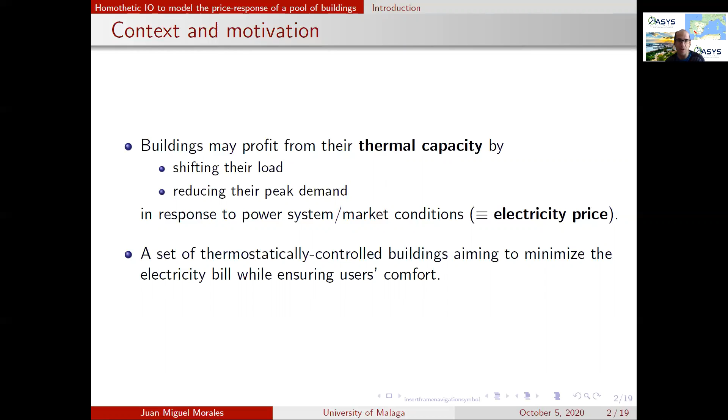Our goal then is to model and forecast the aggregate price response, that is, the aggregate thermal power consumption of the ensemble of buildings. We are facing three main challenges here. First of all, we want to do this prediction one day in advance for the 24 hours of the following day. Furthermore, we want to do it well, and for that purpose, we will need to capture both the thermal dynamics of the pool of buildings and the user's reluctance to experiencing discomfort. So let's see how we are going to do this.

This slide introduces the key ingredients of our approach. Throughout the presentation, we are going to talk about a building prototype, which is going to represent the average behavior of the pool of buildings. We will use the superscript P to represent the operational variables that refer to this prototype building. We will consider that the feasible operational region of the actual ensemble of buildings can be described well enough, at least, as a homothet of the feasible operational region of that building prototype. This homothetic transformation is going to be characterized by two parameters, namely the dilation factor beta and the translation vector tau.

Okay, the variables and parameters corresponding to the aggregate building model will be identified with the superscript A. Our forecast model will also make use of a piecewise linear utility function with marginal utilities M. These marginal utilities drive the maximization of the building's users' welfare and the minimization of their discomfort. Finally, we will use inverse optimization to infer or statistically estimate parameters beta, tau, and M, which characterize our forecasting model, which is in turn formulated as an optimization problem. That's why we need to use inverse optimization for the statistical inference.

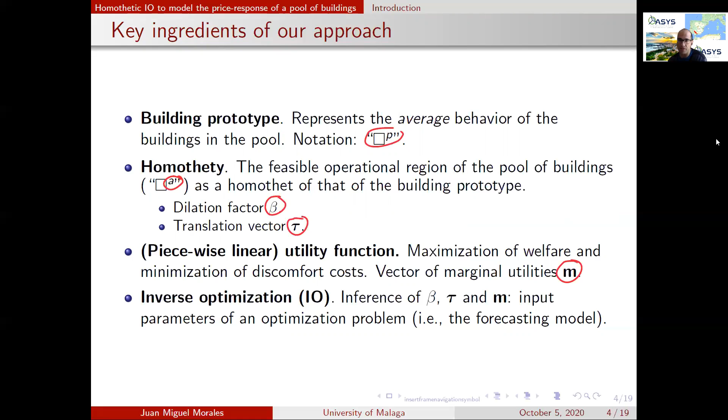This is the model we use to capture the thermal dynamics of the prototype building. It is essentially a first-order discrete dynamic model where in blue, we have indicated the parameters or data that we know, while in black, we have the operational variables that are to be controlled or kept within certain limits. For example, this variable P represents the cooling power because we are considering only cooling mode here. This cooling power must be lower than the rated power capacity, which is a blue parameter, okay, it's data.

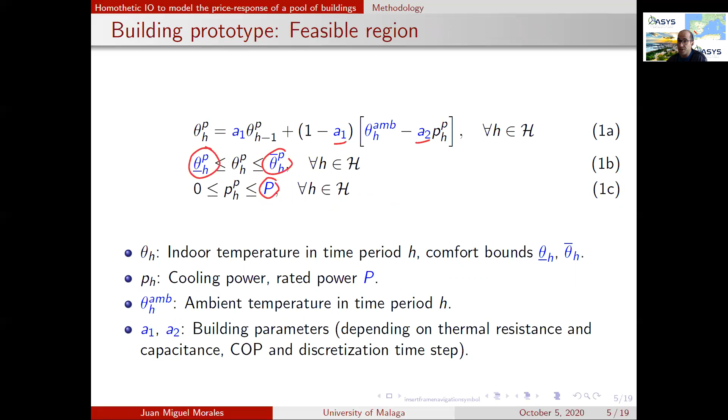Then besides, theta here stands for the state variable, which is the indoor temperature that must be kept within the comfort bounds, upper and lower. The theta amb represents the outside temperature, and parameters A1 and A2 are characteristic parameters that depend on the building thermal properties and the discretization time step. This is exactly the same model as before, but in a matrix form, okay? Here in 5, sorry, we have the equations. The equations are given for all the hours of the day, while here we have collapsed them using matrices and vectors.

So here comes the core idea of our approach. We assume that the aggregate cooling power, PA, can be obtained as a homothetic transformation of the cooling power of the building prototype. So 3A and 3B constitute the model of the aggregation of buildings that results from this transformation. In pink, very importantly, we have highlighted the parameters beta and tau that characterize the homothetic transformation, and that we will need to estimate statistically using inverse optimization, as I will explain later.

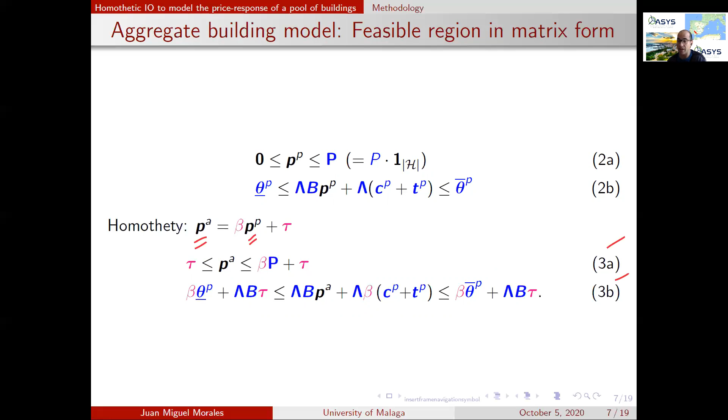So we are now ready to introduce our forecasting model. 4B, 4C, and 4D, here, here, and here, are the homothetically transformed thermal equations we have just seen. In the objective function, we have the maximization of the pool utility by way of the vector of marginal utilities, and the minimization of the discomfort cost.

So how does this model work? Given the 24-hour vector of prices, lambda d, which is a blue parameter because it's given, we solve this utility maximization problem that captures the pool thermodynamics by means of 4B, 4C, and 4D, to compute the forecasted aggregate cooling power.

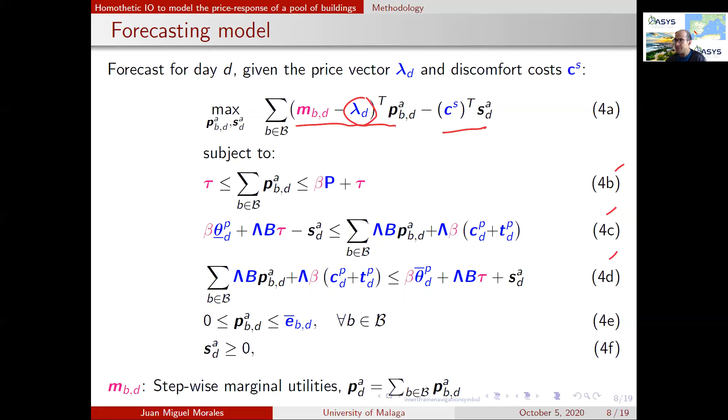As I said before, we consider a piecewise linear utility function, which renders a stepwise marginal utility function like the one I'm representing here as an example in this figure. This one consists of 3 steps. The aggregate cooling power is given as the sum of the contributions from each of these steps, or blocks.

Just to mention also that we make the vector of marginal utilities, which in this example is characterized by 3 values, M1, M2, and M3, an affine function of some covariate information that I will explain later in our numerical experiments, but it's given info as well.

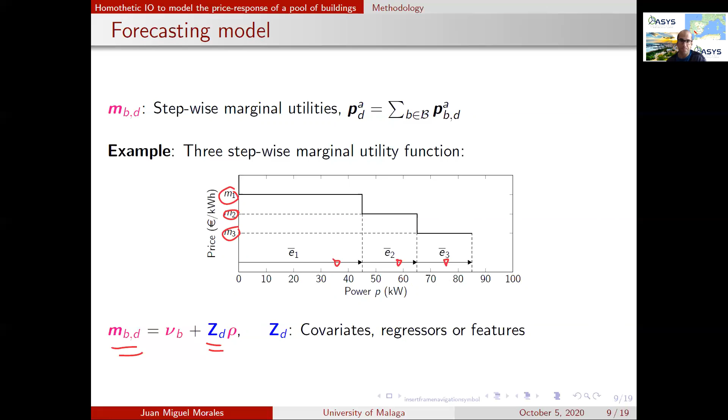So the question now is, how do we estimate the characteristic parameters M, beta, and tau? These are the parameters of an optimization problem, our forecasting model. So we use inverse optimization, which translates into solving the following bilevel program.

The idea is that given observations about the aggregate consumption of the pool of buildings, the associated vector of electricity prices, and the covariate information, the upper level computes beta, tau, and the vector of marginal utilities, such that the cooling power delivered by our forecasting model, that is the lower level problem, matches as much as possible the observed one. This here is the vector of the observed aggregate power of the pool of buildings in day d. We do this on a training set.

The upper level problem also includes constraint 5B and constraint 5C, this one, to guarantee that the piecewise linear utility function is monotonically increasing. The upper level variables beta, tau, and m enter our forecasting model, the lower level problem. Then we have the upper level that seeks to minimize the mean absolute error on the aggregate power consumption of the pool of buildings.

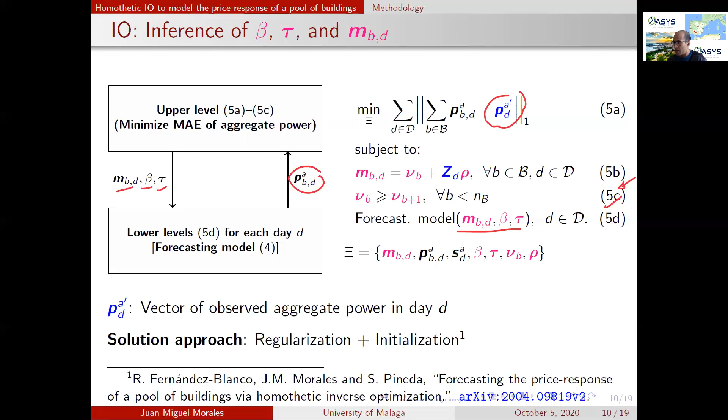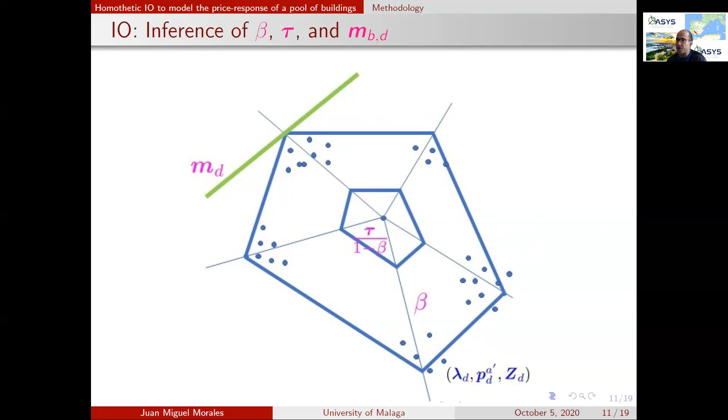But furthermore, we also compute a vector of marginal utilities so that these observations are not only feasible, but also optimal. Optimal for our forecasting model, which is an optimization problem.

Next we present some results from numerical experiments. In particular, we have tested our approach on a synthetic data set obtained assuming that the thermal power consumption of each building in the pool is controlled by means of the optimization problem represented here, optimization problem 6. This optimization problem seeks to minimize the electricity bill of each building plus some discomfort cost. These costs are given by a penalty that multiplies the deviations of the indoor temperature with respect to the comfort bounds.

Equations 6b and 6c model the thermodynamics of the building, as we have seen before, and the buildings in the pool are different according to a heterogeneity factor H bar. This H bar controls how different the buildings in the pool are. In particular, the parameters of the building are sampled from a uniform distribution, like this one, whose mean is equal to the values of the parameters for the prototype building.

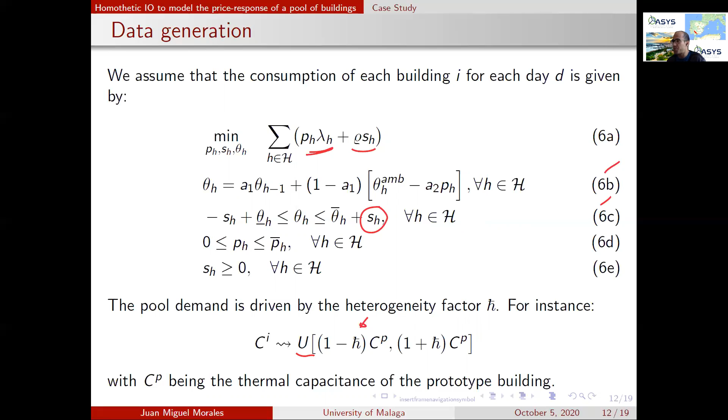We simulate this model, model 6, for 100 buildings and 78 days. We use 35 days for training, 35 days for validation, and the last 7 days for testing. We have created two synthetic data sets, each with a different heterogeneity factor, namely H bar equal to 0.1 and H bar equal to 0.75. Observe that the highly heterogeneous pool features lower peak demand, lower mean, and no hour without consumption.

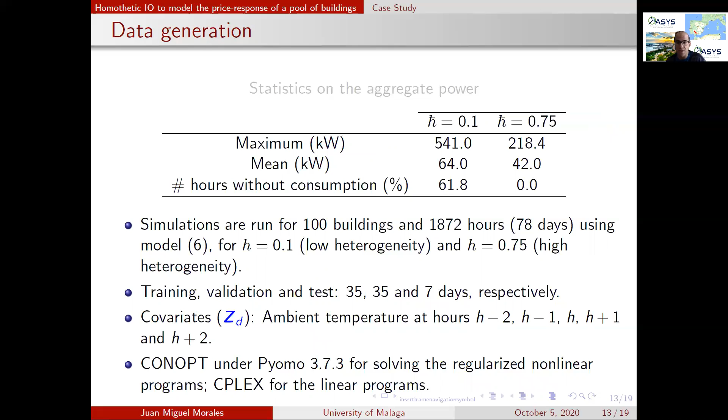We employ as covariates the outside temperature for the current hours and the previous and posterior 2 hours. We use CONOPT to solve the regularized nonlinear problem that results from the bilevel inverse optimization approach. Here I present the methodologies that we have compared. HIO is our homothetic inverse optimization approach.

NTD is the inverse optimization approach proposed in Saez-Gallego and Morales, where they do not explicitly account for the thermodynamics of the pool of buildings. ARIMAX is a classical autoregressive integrated moving average model with exogenous variables. And then we have the naive model, which is basically a persistence model such that the forecast in day D is equal to the observed values in the previous one, in day D-1.

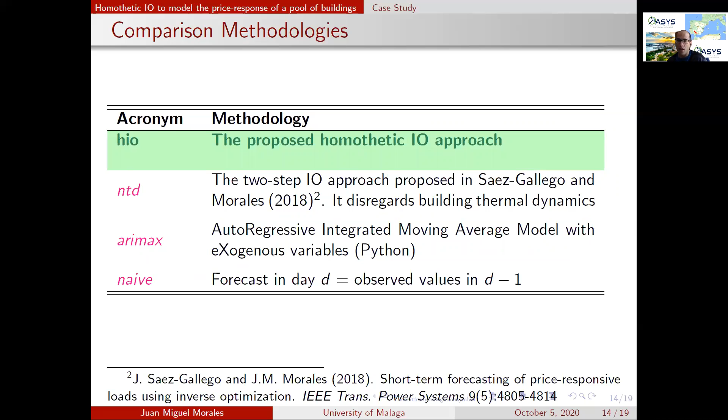Okay, in this table, we compile all the results related to these numerical experiments. We have used the mean absolute error computed over the test sets to assess and compare the different methods. We test, as I said, on the two synthetic data sets that I mentioned before, each corresponding to a different level of the pool heterogeneity, and for two different numbers of marginal utility blocks, specifically 1 and 6. We highlight in pink the best outcome, that is the lowest error.

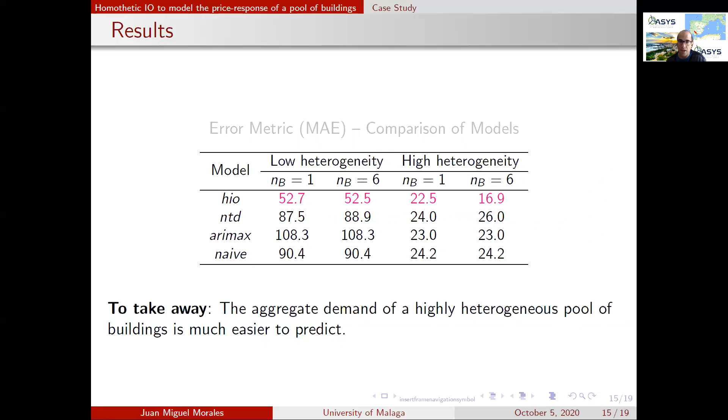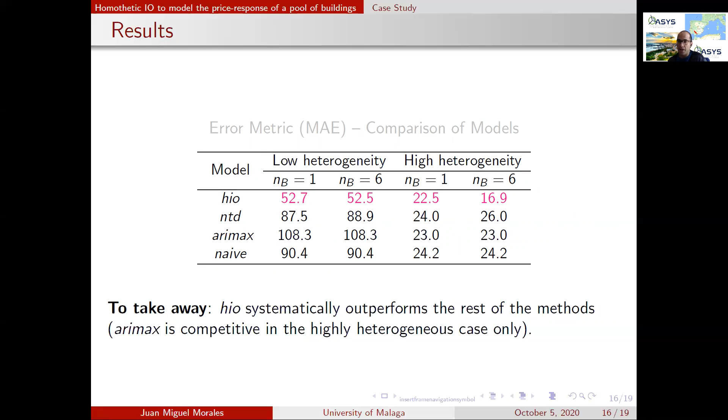First message that we have to take away: it is apparent that forecasting the aggregate demand of a highly heterogeneous pool of buildings is much easier than doing it for a low heterogeneous pool of buildings. Just see the order of magnitude of the error metrics. In fact, our approach systematically outperforms the other methods in all cases. Actually, the ARIMAX model is only competitive in the highly heterogeneous case. Besides, by comparing HIO and NTD, we can see that explicitly accounting for building thermodynamics is significantly advantageous.

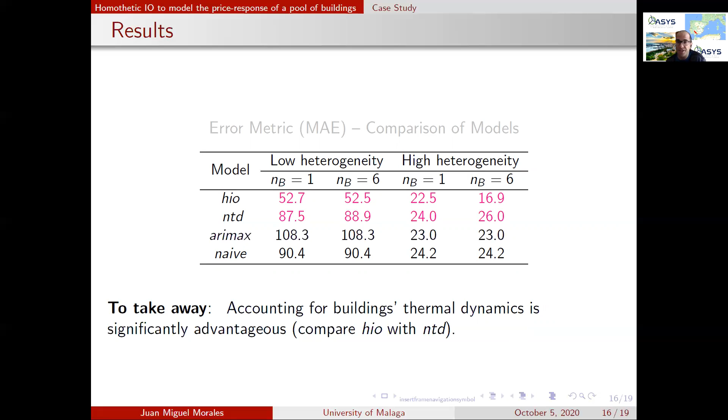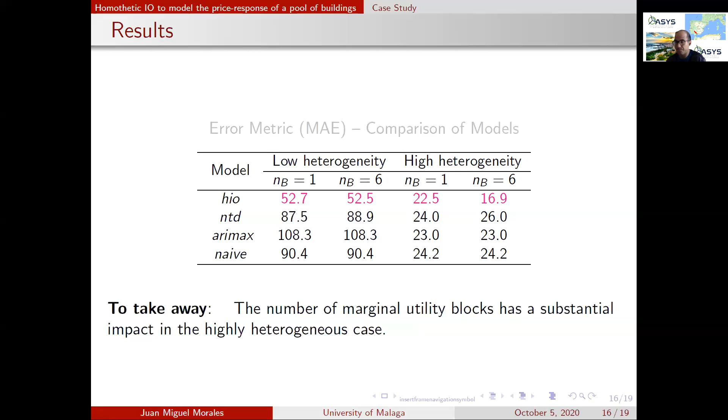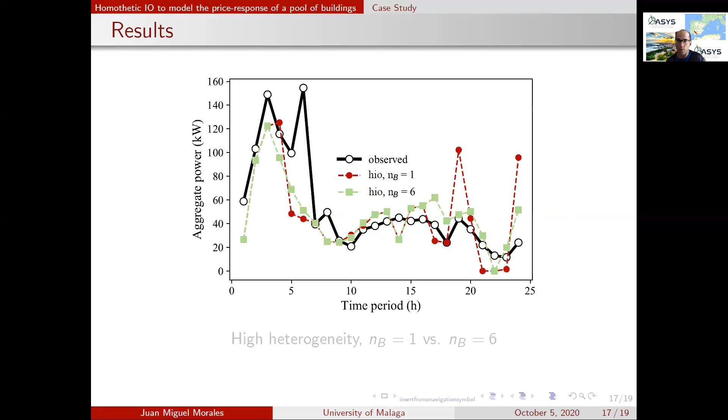The black line here represents the actual observation of the consumption of the pool of buildings for a random day. And we can see that by increasing the number of blocks, that is by going from the red curve to the green curve, what we have done is to smooth out the forecast of the aggregate cooling power of the pool of buildings. To conclude, we have presented a novel technique to forecast day ahead the aggregate demand of a

cluster of buildings. This technique has been built on a homothetic inverse optimization approach that is formulated and solved using bilevel programming. Our approach explicitly accounts for the building thermodynamics while drastically reducing the number of parameters to be estimated thanks to the homothety. Furthermore, our forecasting model represents a representative building operational model thanks to the inverse optimization approach, which makes it very interpretable and versatile. On top of that, it outperforms other techniques available in the technical literature.